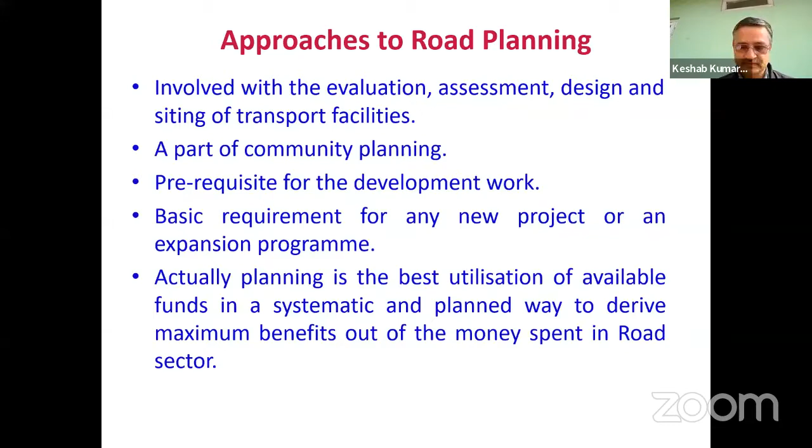Methods of transport planning. This is from a textbook of road transport planning. This is the standard practice.

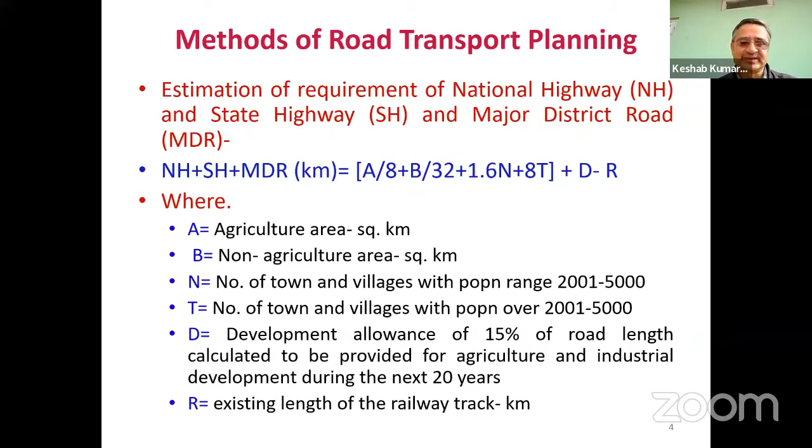Okay. So it is... there's a problem in slide sharing, please. Can you help me from there? You want me from here? Yeah, sure, from the host. Slide number 5, I think.

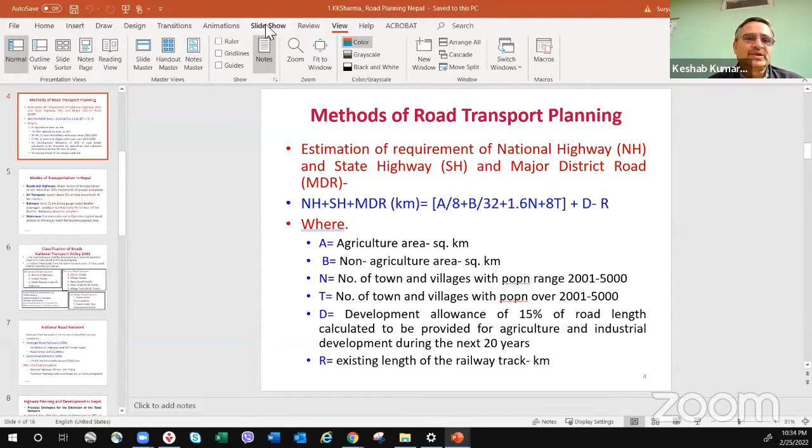Yep, that looks good. Modes, yeah. I wish to present the modes next. Sorry, the previous one, slide 5.

Modes of transportation in Nepal is heavily dominated by road transport, as 90% of movement of goods and freight depends on roads. Similarly, air transport covers about 8% of the movement, and railway is only 35-kilometer broad gauge, just ready for operation. It was narrow gauge in the past from Jayanagar, an Indian border city, to Nepal's Janakpur, and 17-kilometer from Kurtha to Bijulpura. It is almost ready, that is only 52 kilometers. It is ready for operation, but it is yet to start.

We hope from next month the rail will start regular passenger service. Waterway, commercially till now, is not in commercial operation. There are some small vessels on the major rivers for rafting or touristic purposes, and small ferries are now in operation.

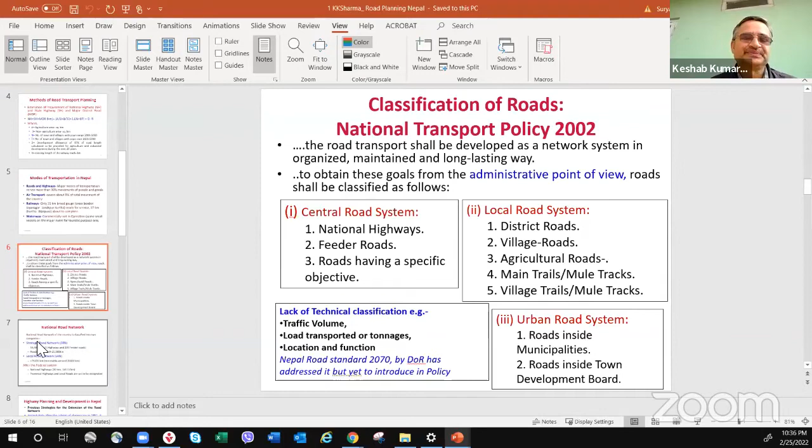The next slide. So, there was a question here, just quick. There was a question, why can't we present in Nepali also? So just feel comfortable, whatever you feel comfortable. I just wanted to share that question.

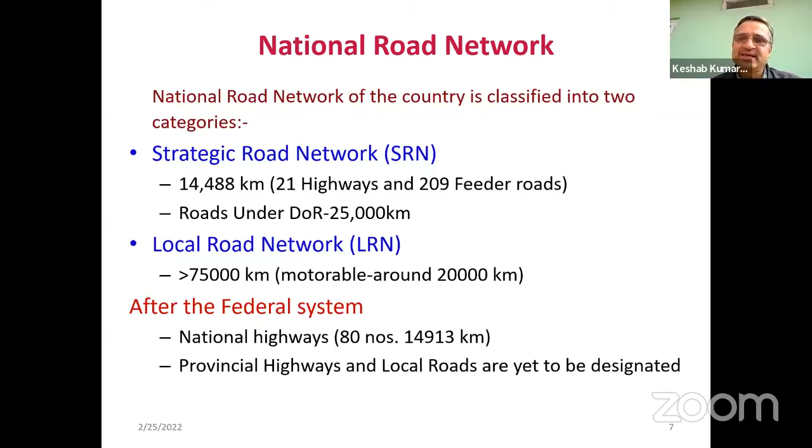Okay. So national roads network, हामीसँग strategic road network, which is under the federal government. It is almost 15,000 kilometers. And local road network is almost 75,000 kilometers. But after the federal system, we have just designated 80 highways as national highways, which is almost 15,000 kilometers in length. Provincial highways and local roads are yet to be designated from the respective level of the governments. Next.

Regarding the planning approach, I already presented in my previous slide that we had not applied that formula or any other standard as in the textbooks. We had an approach that road extension or development of the country is based on the following approaches. Immediately after the advent of democracy, that is in 1951, it was felt a reliable road network was needed. After that, development of the country, promotion of national integrity and efficient administration of fast and reliable means of communication was required. The best alternative could not be other than the road transport.

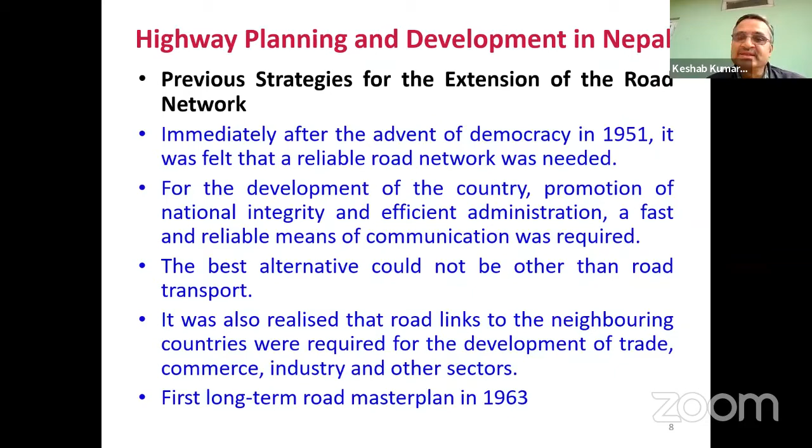So it was also realized that road links to the neighboring countries, link with China and India at that time. So this Tribhuvan Rajpath and Arniko Highway constructed at that time. First long-term road master plan was developed in 1963. Next. After that, the road Master Plan 2003 to 2022 was developed.

Before that, the approach for road planning development plan, we had some strategies applied at that time. That is, establish road link from Kathmandu to the nearest border town, construction of East-West Highway, construction of link road, China border, Arniko Highway, link road to economically vital center within the country, construct access to all zonal and district headquarters. It was actually the strategies of the government how to develop the road network.

Then 20-year road master plan for strategic road network was prepared in 2003 up to 2022 period. And then for the local road network, all the districts prepared district transport master plan, and the local level roads were developed based on that master plan. Next.

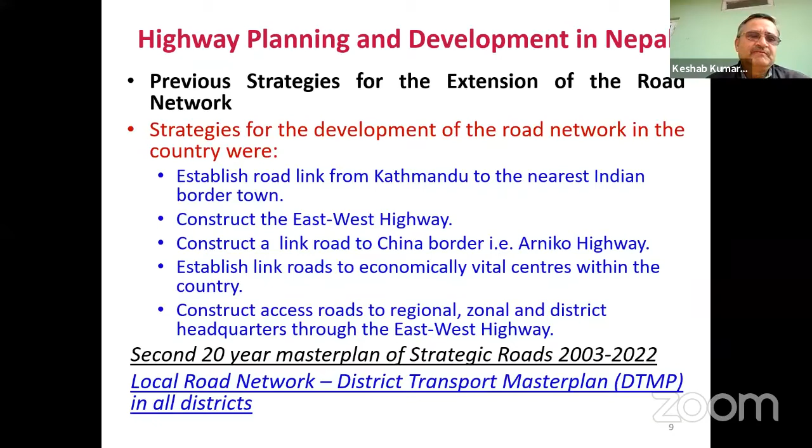Yes, Sabji, you have about 2 minutes.

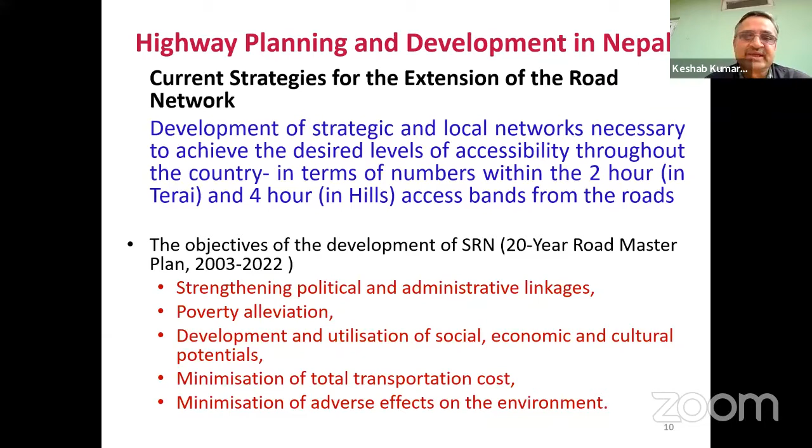Okay, current strategies, now the strategy has been changed after the 20-year master plans enforcement, strengthening political and administrative linkage, poverty alleviation. It was linked with poverty alleviation, development and utilization of social, economic and cultural potential. And the overall plan was based on National Transport Policy 2002.

After that, 20-year master plan, priority investment plan, periodic plan, 3 and 5 years periodic plans we have, and then MOPIT in 2016 prepared a 5-year strategic plan, and then annual projects. These are the hierarchies of planning for road development in Nepal, but not complied fully, as the annual projects come from out of the plans. Next.

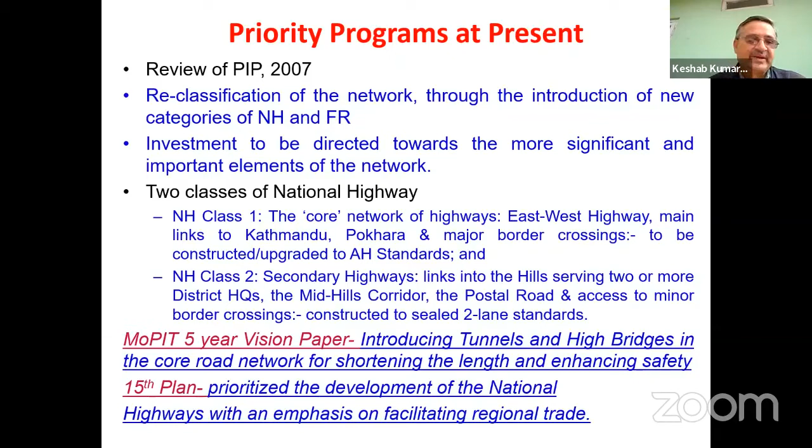This is the strategy we have adopted in our priority investment plan. That is core highways and secondary highways. We are developing the highways in 4-laning, like expressway, Kathmandu Tarai, on the basis of this priority plan. Next.

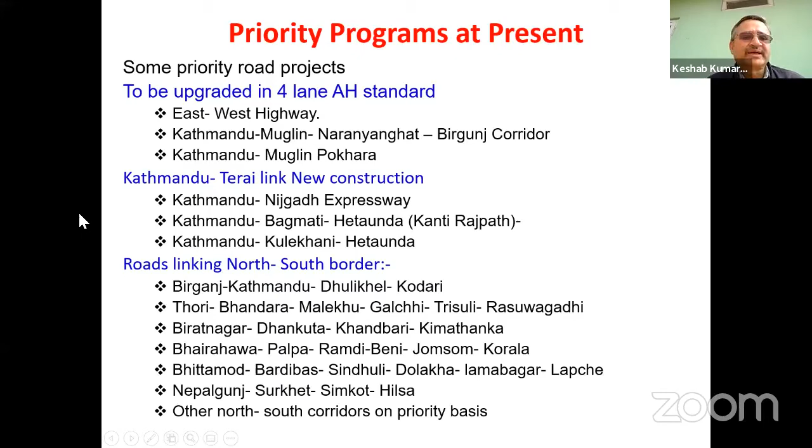We have these road sections to be upgraded according to the priority program of the government. That is East-West Highway, Kathmandu Mugling Narayanghat Birganj corridor, and Kathmandu Pokhara. These are under 4-laning these days. So I would like to go to the next slide.

So there are some issues of planning in road transport in Nepal. Transport policy is almost 20 years old, so it couldn't address the 3-tier federal system of the government. Lack of multimodal transport plan; the road sector is dominating heavily in the transport sector. No single authority responsible for road development. Even in the central government, there are the Ministry of Local Development, Ministry of Urban Development, and Ministry of Physical Infrastructure and Transport. So there is no single agency.

Confusion in priority for projects, scattered projects, many projects with less financial resource. So too many road projects, political domination over the professional idea during planning, non-feasible road projects, various standards, no integrated national standard. Various agencies have their own standards, non-compliance with the standard planning process or best practice, reluctance of the private sector in the development of roads, and sustainable use of the road asset as well.

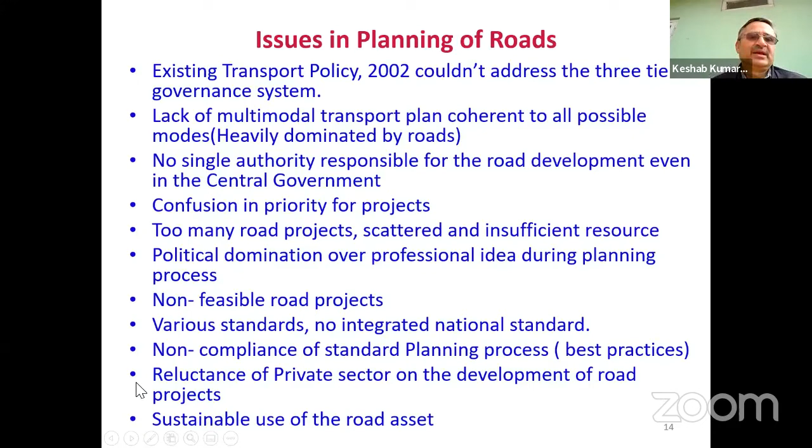So for addressing those issues, I would suggest some ways forward in this slide. New transport policy addressing the rights and responsibilities of all three tiers of government under the federal system. Integrated transport master plan coherent to all feasible modes on a competitive and complementary basis. Single agency to be responsible for each tier of the government for the development of road transportation. Effective coordinating body for all levels of government.

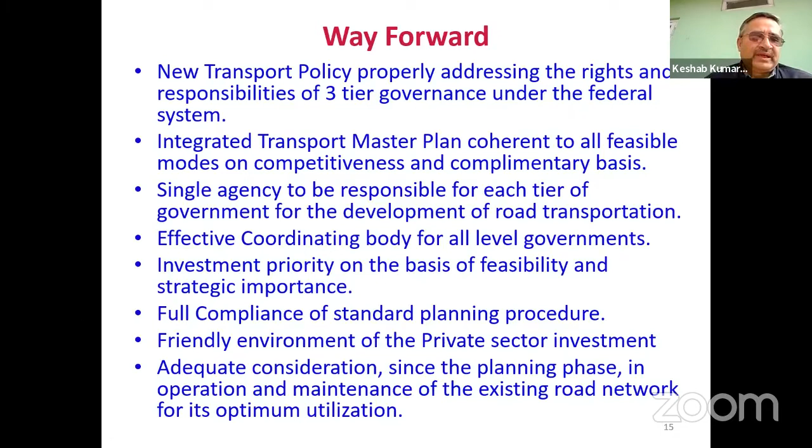Investment priority on the basis of feasibility and strategic importance. Full compliance with standard planning procedure. Friendly environment for private sector investment in road development. Adequate consideration, from the planning phase, of operation and maintenance of the existing road network. These are some ways forward which we have to consider in planning the road transportation system. This is all I wish to present here, and I will address any queries from the participants.

Thank you, Mr. Sharma. Let's move to our next presenter. All the questions we will be answering at the end of the session. Dr. Parajuli, the floor is yours now. So you will be controlling my slides, right? Yes, sir. Mr. Thapa will be moving your slides. Okay, Mr. Thapa, can you show me the first one? Go back to the first one.

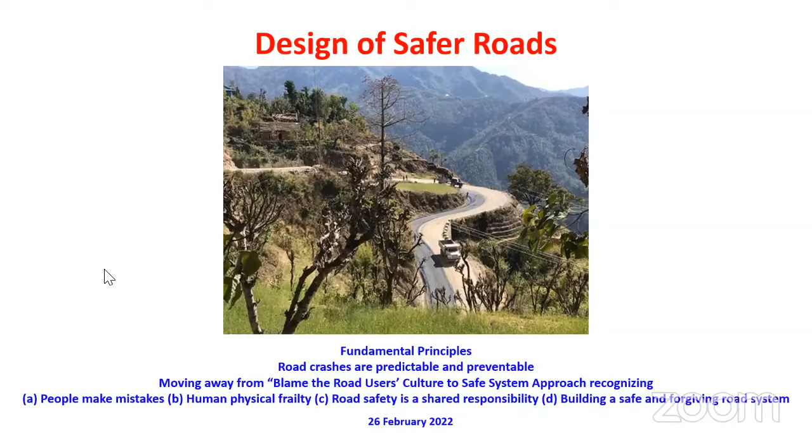And then we need to build a safe and forgiving road system while designing the road. It's not just about designing the road, the embankment, the structure. It's about designing the environment itself. Next slide, please.

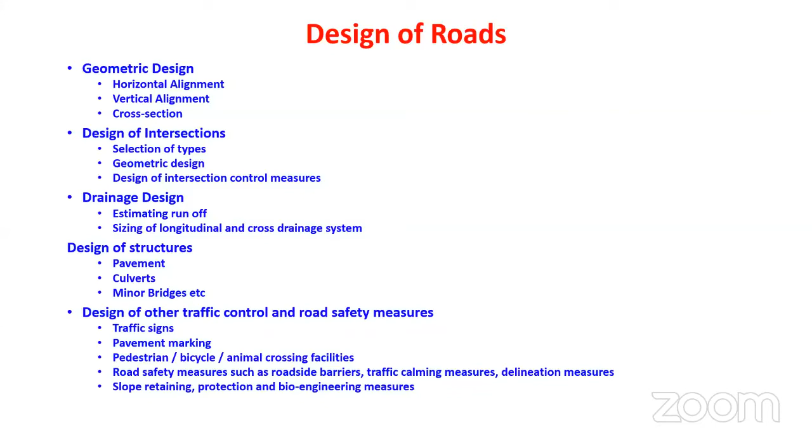With this slide, I'm taking you back to your university time. These are some of the elements we have to deal with in the design of roads, which you are all aware of. People with a civil engineering background all know about road engineering. This is what we dealt with in the design of roads at university. Let's go next. Next slide, please.

Now, we need to recognize a bit of what the design philosophies are. There are old schools of thought and new schools of thought. Today I'm presenting a bit of the new school of thought because this is very critical in the design of safer roads. There are three different domains that have been applied in the design of roads: the normal design domain, the extended design domain, and the third one is design by exception.

So the difference here in the design of roads in Nepal is that we tend to adopt a normal design domain only. Nepal road standards and many other standards basically require that the road design engineer design a road with the values, for example the shoulder width or the carriageway width, in the normal design domain, which is a bit less flexible or less liberal than what we can use during the application of the extended design domain or during the application of design by exception.

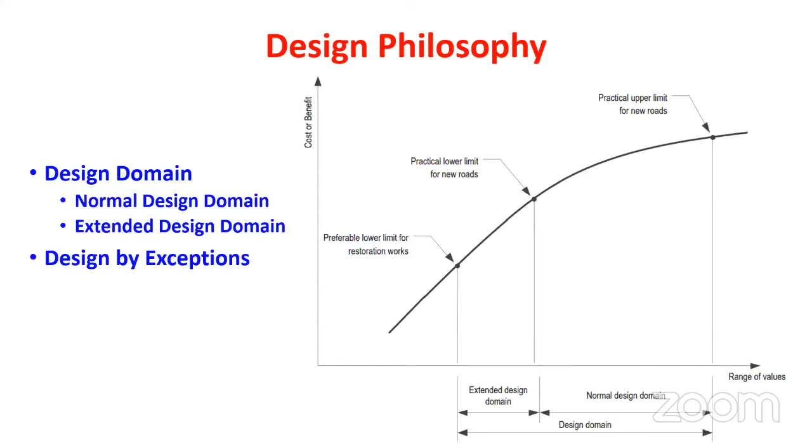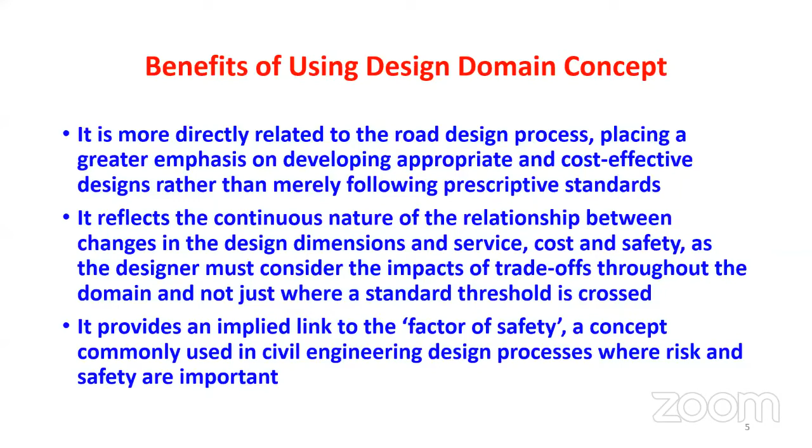So I just wanted to highlight some of the benefits of using the design domain concept. It allows flexibility to the engineers rather than just taking one single figure for the design carriageway, for example, 3.5 or 3.75 meters wide. It allows the designers to use different figures that they think are reasonable and that will be fit for purpose and so on. Next, please.

And we need to have the flexibility. The designer needs to have the flexibility to use values less than that. For example, a 3.25 meter width may be enough. Why do we have to use a 3.5 meter wide carriageway, when even 3 meters may be enough for urban roads? Why do you need to provide a 3.5 meter carriageway in the urban road? That's a typical example. There are many other examples where we can apply extended design domain and design by exception values. Next, please.

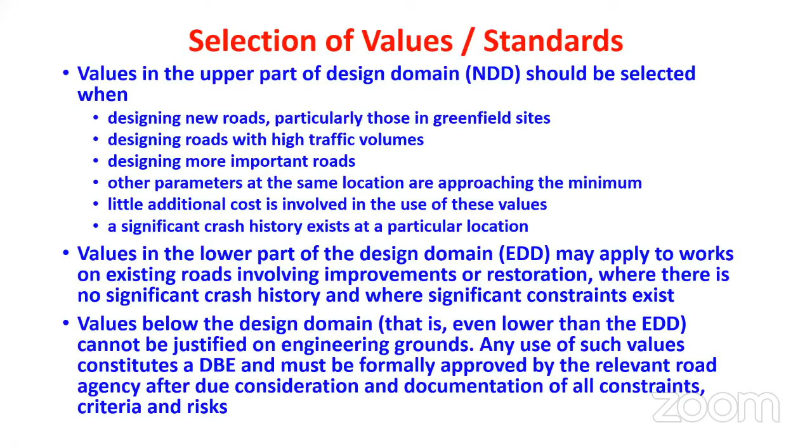The current Nepal road standards require that we design a national highway with a 2.5 meter shoulder. But what I'm saying here is, if there are terrain or other constraints, we can go as low as 0.75 meter. And by the way, the Nepal road standard also allows a 0.75 meter shoulder width in constrained situations, but that's not the case for all other parameters. Next, please.

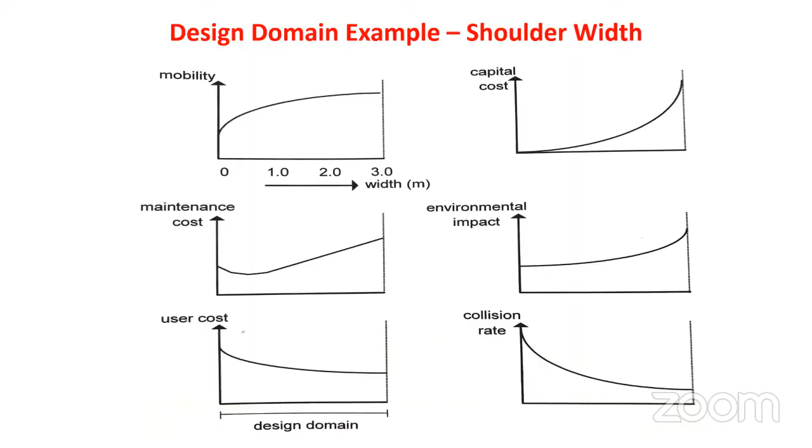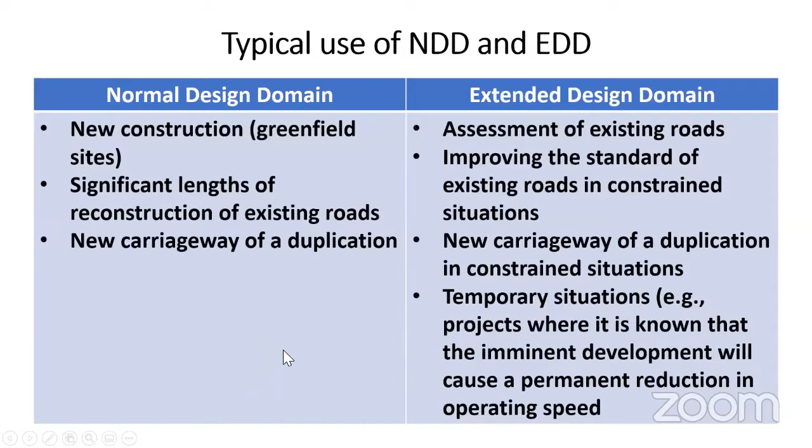Okay, now the design domain, just to give you an example of how we can apply it. When you use wide centerline treatment for safety measures, we can use the normal design domain of 1 meter wide centerline treatment. That doesn't mean that we have to use a 1 meter wide centerline everywhere. We can use 0.6 meter wide centerline treatment if we apply the extended design domain concept. And if you can demonstrate that the risk is assessed and mitigated and safety is not compromised, then we can use 0.5 meter wide centerline or median treatment if we apply design by exception.

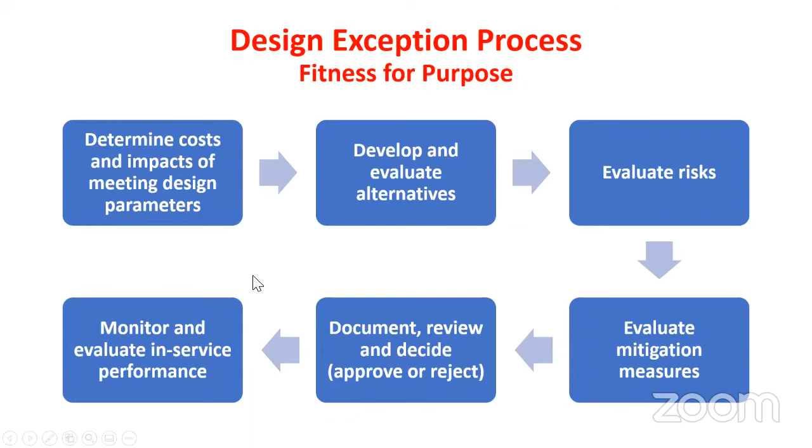There are a lot of things that need to be done, a lot of issues, a lot of challenges, and therefore a lot of opportunities for improvement in the revision of the Nepal road standards. That's the thrust of this presentation, and this is what I am suggesting: we need to revisit the road classification and connection strategy before we develop a new version of the Nepal road standards. Next, please.

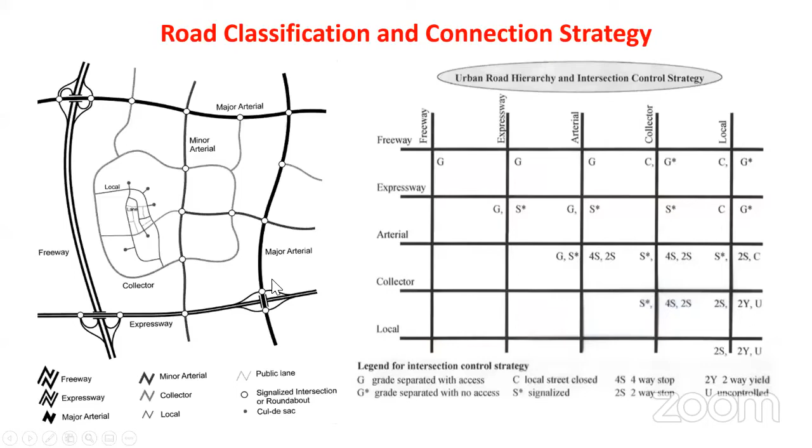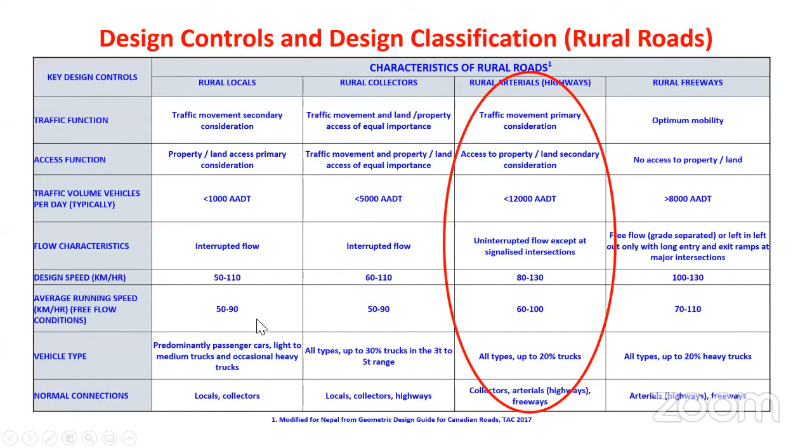Based on that classification, this is just one idea to flag to Nepalese engineers and engineers practicing in the USA who want to contribute to the development of the new revised Nepal road standards: design controls, classification, and consistency. So this is the classification approach that we may suggest in the development of new road standards. Next, please.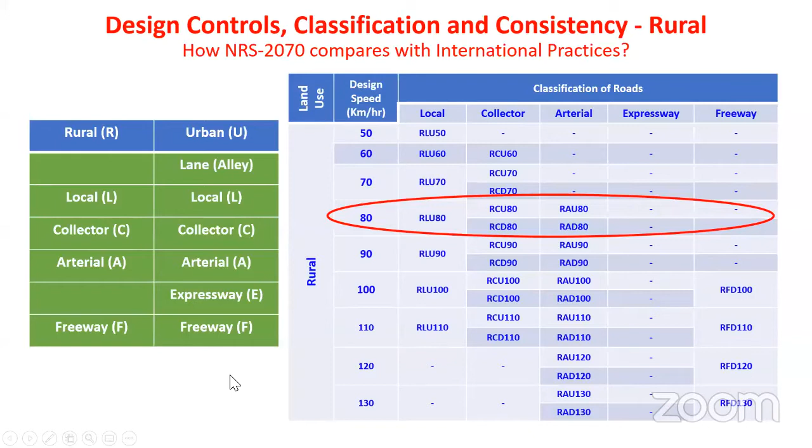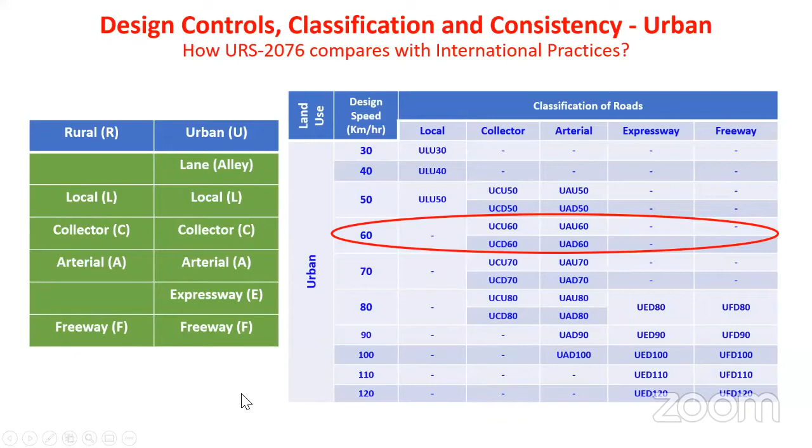And this is probably for the urban road environment. Different classes of road, and there are so many classes of road that we can introduce, not just national highway or collector and arterial. This is based on the speed, the functional classification of the road, and whether there is a median in the center or not. See, this is divided arterial urban.

And this is a road environment and road classification design table, which shows a lot of figures. I don't want to go into that detail. So these are the parameters, just to plan what we can suggest in the revision of the Nepal road standards. Next, please.

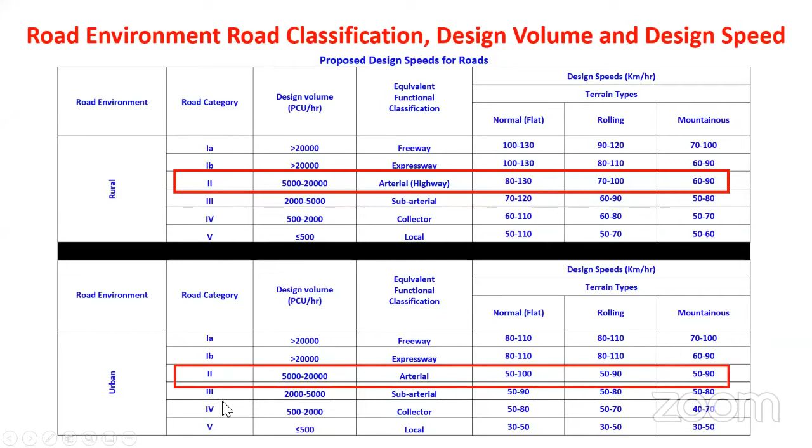Yeah, there are so many numbers here; you can look at this. The fundamental issue is that the classification of roads for urban and rural environments should be different, and we need to use many classifications, not just a few, like 4 or 5. Let's go next, please. And this is another one, basically the rural or urban design classification and design speed again. Next, please.

Next, please. Yeah, next, please. Yeah. Again, the same issue here. Go ahead. Now, okay.

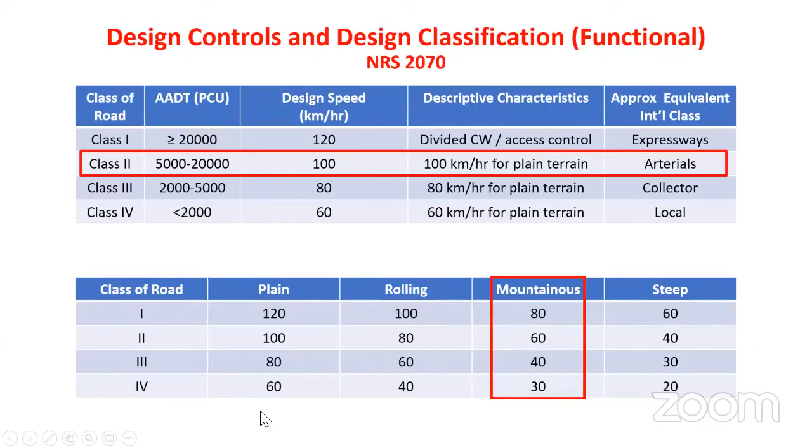So I'm just now comparing with those figures. So many figures there, so many classifications of roads that we need to introduce if we want to design a different class of road. One class of road does not fit; one size does not fit all is the basic philosophy here. So what is the difference here in design controls and design classification? In functional classification, Nepal road standards have only 3-4 classes of road with 4 different ADT and design speeds. So if you have a class 2 road design, then you have to apply only 100 km/h. What I wanted to show on the previous slide is that there are so many classes of road that we can apply.

So today I'm going to discuss with you all the maintenance of road assets in Nepal. Next slide, please. I would like to begin with what a road is. The road is more than what we think it is. The OECD International Transport Forum has defined road as more than asphalt, concrete, or steel. It is the backbone of national economies, providing connections for people and goods, access to jobs and services, and enabling trade and economic growth.

So road has a broad function of providing services to all. Even though we stay at home, we get newspapers or milk, and kids are going to school using bike or bus, and roads deliver services to all, even those who are staying at home waiting for mail, e-commerce delivery, nursing services, and ambulances. So even for those people who do not travel, the road is essential. That is where I start, and this essential commodity is not properly maintained.

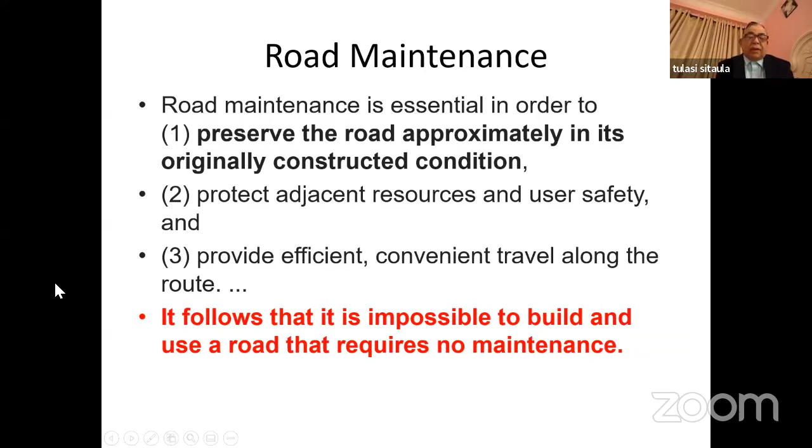Road maintenance is one of the neglected areas, and we need to maintain our roads to preserve the road approximately in its originally constructed condition, or to maintain the level of service, and also to protect the adjacent resources and user safety, and provide efficient, convenient travel along the route, that is a level of service. And it follows that it is impossible to build and use a road that requires no maintenance. Hence, we need regular maintenance of roads if we want to use it at a very good level of service, and also for preserving the asset. Next.

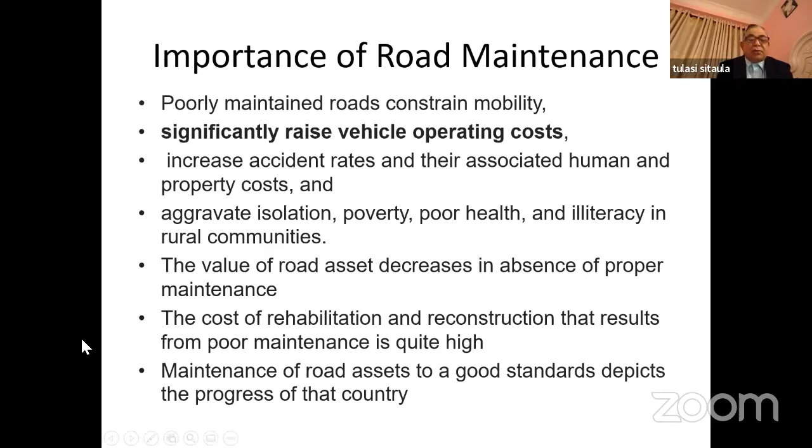We know the importance of road maintenance because poorly maintained roads constrain mobility, significantly raise vehicle operating costs, increase accident rates and their associated human and property costs, and aggravate isolation, poverty, poor health, and illiteracy in rural communities. The value of the road asset decreases in the absence of proper maintenance.

The cost of rehabilitation and reconstruction resulting from poor maintenance is quite high. Maintenance of road assets to a good standard depicts the progress of that country. Road maintenance is very essential work, but it is mostly neglected in most developing economies. Overcoming the backlog and implementing road asset management benefits the whole society and country by improving decision making with better data, ensuring mobility and its benefit to society, managing the network efficiently, preserving this huge financial asset, and providing a safe and reliable road free of risk to road users. Well-maintained roads promote better living.

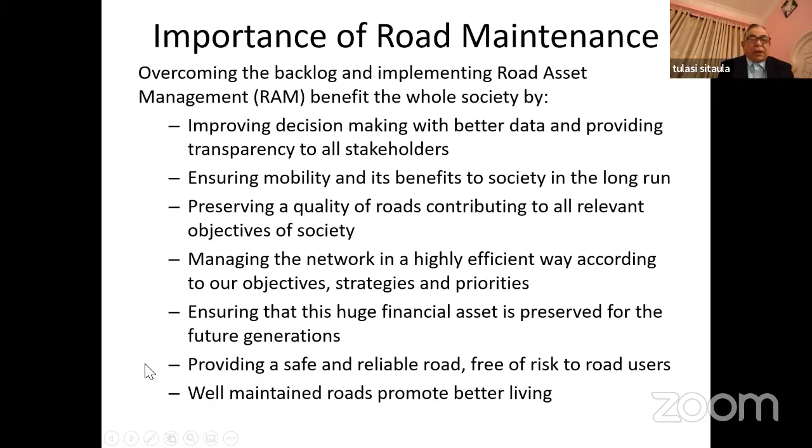Now I'm going to talk about the Nepal context of maintenance. Nepal had an ad hoc maintenance practice started during the Rana regime. There were some roads in Kathmandu Valley during the Rana regime, and they used to maintain the road through an office called Bato Kaj Goswara.

Responsive maintenance through gang labor was practiced up till 2053 BS in Nepal—just up till 25 years from now, maintenance was purely responsive. Planned maintenance, consisting of routine, recurrent, and preventive maintenance, was initiated in the year 2053 BS, and it is adopted till now. We are still in that system.

There are mixed results with this planned maintenance approach, and it is time to think about a new, efficient, and innovative maintenance system for Nepal. Performance-based maintenance contract, PBMC, was applied to some road sections on the East-West Highway with donor support during 2060-2067 BS. The results were not as planned, and PBMC was then stopped in the year 2067. It has already been 11 years and we could not start it again.

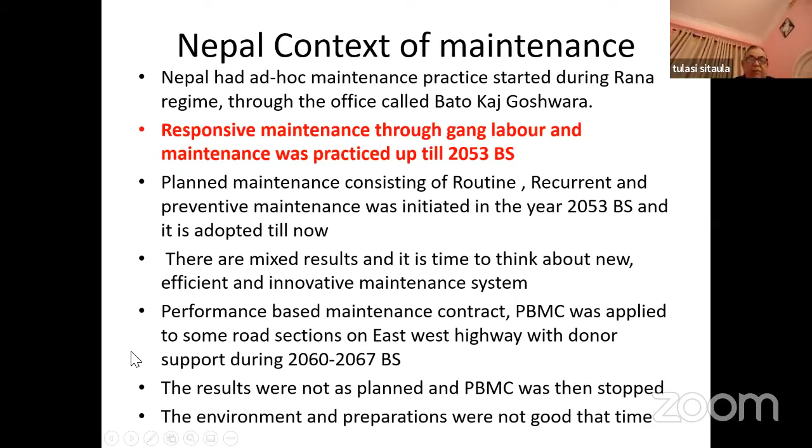We are discussing and thinking of restarting it. The environment and preparation were not adequate at that time, so we have to discuss again and start the PBMC.

Lack of adequate maintenance and lack of maintenance funding is the major cause of backlog. There is no adequate maintenance funding, and for whatever funding we have, we are not consuming all the money allocated for maintenance. So the result is poor maintenance of our road asset.

Maintenance activity did not get due priority at all levels. There has been no growth in the maintenance budget over the last 4 years—if we look at the budget, it is stagnant. Asset and network management activities are needed to ensure that the transport agency has a robust system and process in place for asset and network management planning and investment decisions, which we lack as well.

We need to adopt an approach of nationally planned, provincially delivered, because the central government needs to make the policy, while implementation of most of the road goes to the provincial level. So we have to go for this approach with our federal system.

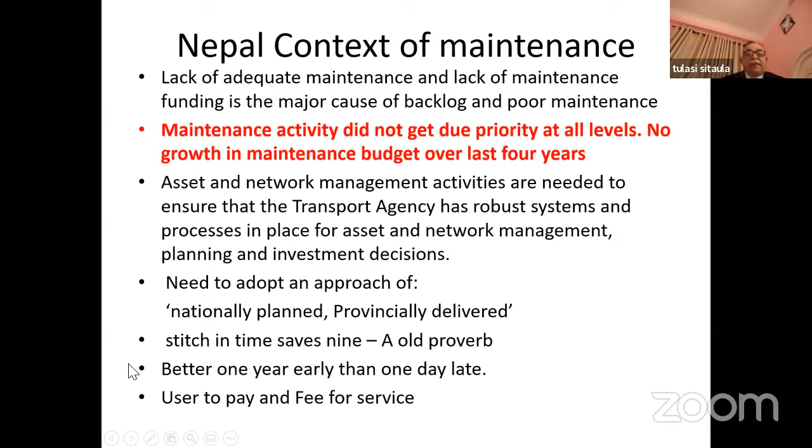We all know that a stitch in time saves nine, so we have to maintain our roads at the proper time. It is often said that it's better to maintain the road 1 year early than 1 day late. User-to-pay and fee-for-service is the present concept of maintenance and commercial use.

Our roads are facing problems in maintenance because we have very poor water management on our roads. In one of the photos, the dust management issue is also shown. So regular maintenance is also poor with us.

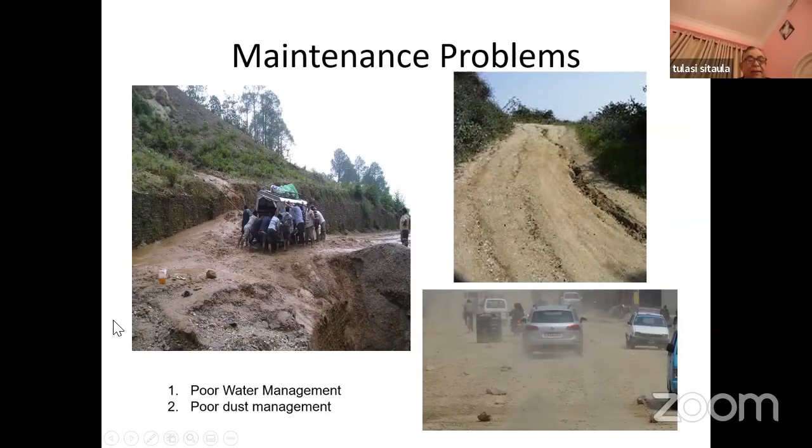Road is an asset, and it should be managed in that way. Roads are an asset from an economical point of view. Investing in new or existing roads increases the capital stock of society. Transport infrastructure is necessary to enable production and trade of goods and services and to provide citizens with mobility.

Chronic underfunding and poor maintenance very quickly damage this huge asset built at great expense and effort in the last decades. A well-managed transport infrastructure is vital to the economic stability, growth, and social well-being of the country. Highway structures like bridges are fundamental to the transport infrastructure as they form essential links to the road network. It is not in the public interest to allow highway structures to deteriorate in a way that compromises the functionality of the highway network, be it through restrictions or closure caused by unsafe structures, or the disruption of traffic through poor planning of maintenance work.

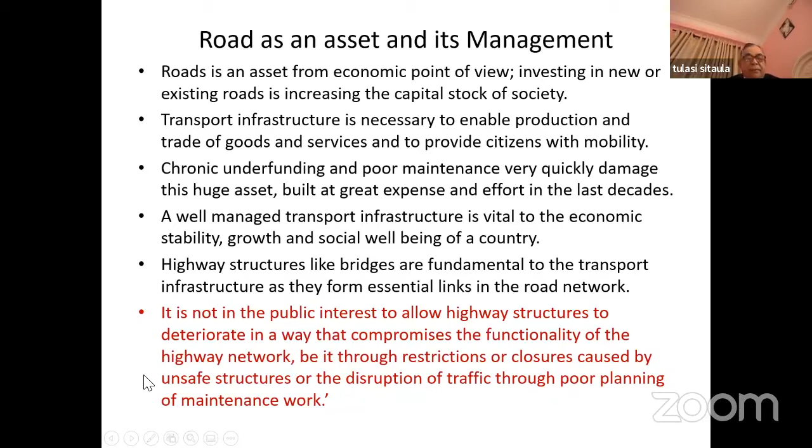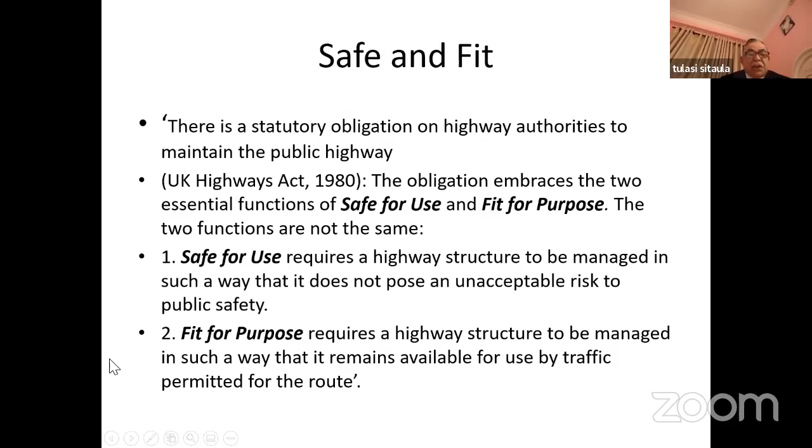So there's a concept of safe and fit for highway. Actually, it comes from the UK Highways Act 1980, which says the road should be safe for use and fit for purpose. This means it requires a highway structure to be managed in such a way that it does not pose an unacceptable risk to public safety, and also that it remains available for use by traffic permitted for the route. So these two fundamentals are to be taken care of while managing a road.

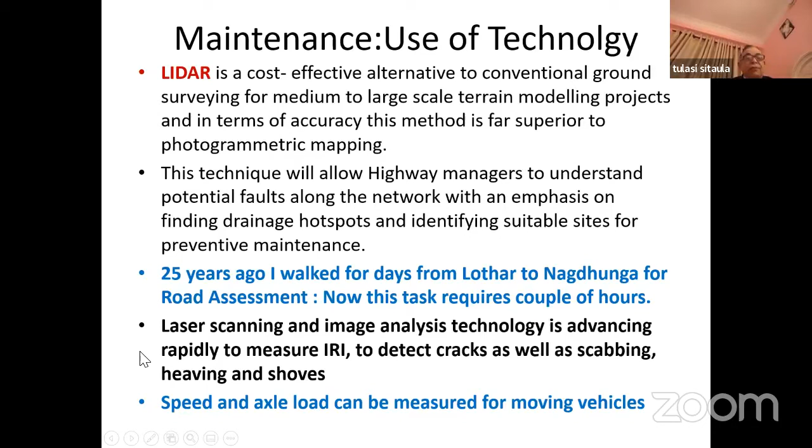Nowadays technology can help us a lot in managing our roads, like LiDAR technology. For example, 25 years ago, I walked from Lothar to Nagdhunga just to inspect and assess the road for maintenance. Now this job can be done in a couple of hours. We also have laser scanning techniques, and even speed and axle load can be measured for moving vehicles. So the technology has supported us a lot, allowing us to do the job very efficiently and quickly.

So we have the DOR vision, which is to ensure that 95% of our strategic road network is in good and fair annual condition. But if we look at the result, it is less than 80%, so we are far away from the target. We also want to substantially reduce the accident rate.

The DOR mission is to contribute towards the betterment of living conditions of the people through effective, efficient, safe and reliable road connectivity. There is a road safety action plan for 2013-2020, and now another one is being prepared for 2021-2030. It is about to be finalized, and the Road Safety Act is in Parliament.

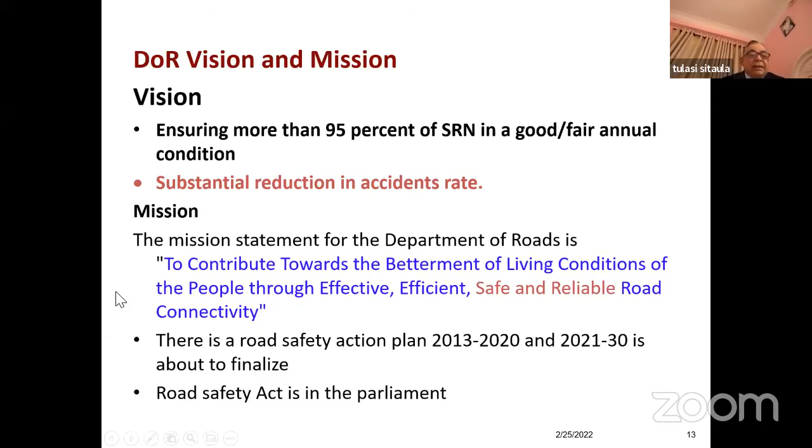We know the concept of pavement management. We don't want to allow the pavement to deteriorate to a very low service level, so we intervene at regular intervals to preserve the asset as well as maintain the level of service.

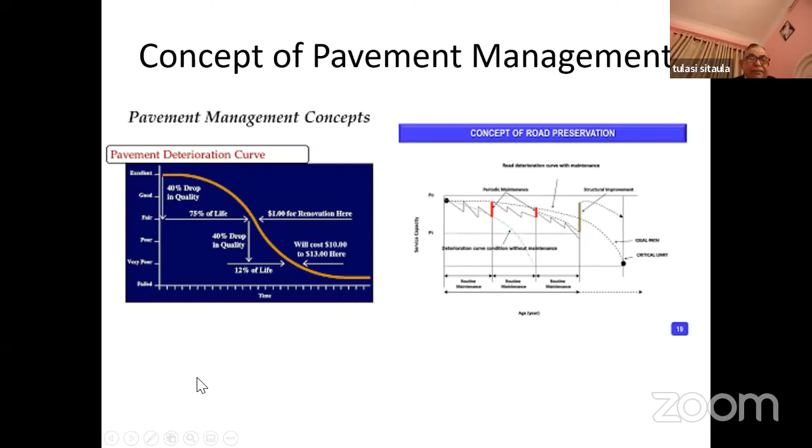So we have a maintenance strategy: whether to allow the pavement or our asset to deteriorate to the lowest level and then invest in rehabilitation and reconstruction, or go together with routine maintenance, periodic maintenance, and preventive maintenance as well.

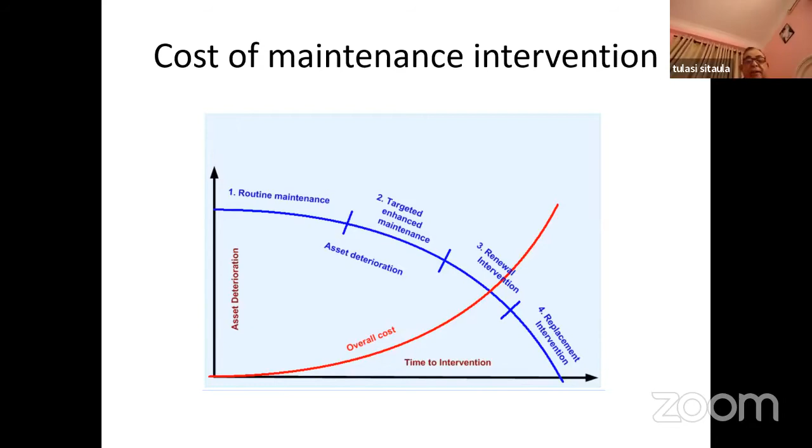The cost of maintenance intervention is less if we do it regularly, and if we let the road deteriorate and work on it in one step, then the cost goes very high. So this is what I want to show here.

So we have to maintain or manage our roads using a life cycle management concept. It has been realized that the entire road and bridge asset of the country must be operated, maintained, and preserved according to life cycle management principles. A country's road infrastructure inventory is the backbone; we need to have an inventory first. Transport infrastructure provides availability for public and commerce to perform daily tasks. The road network constitutes one of the largest government-owned assets, and road administration must maintain, operate, improve, replace, and preserve these assets, while carefully managing the scarce financial and human resources needed to achieve these objectives.

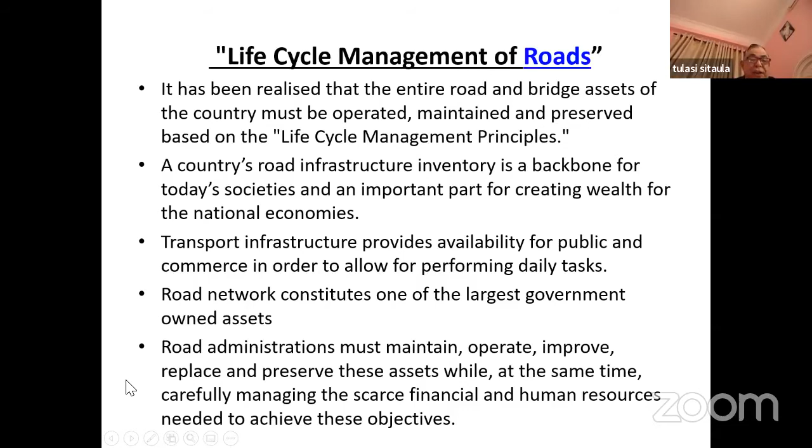There are accidents on our roads—on average, 8 lives are lost daily. So we are not able to control it till now.

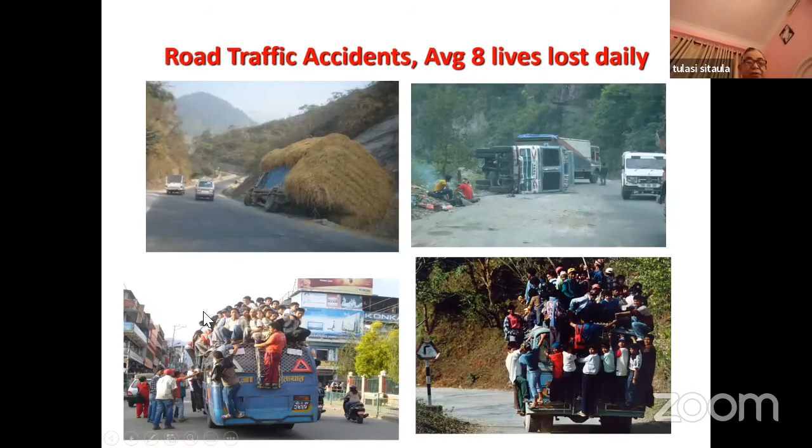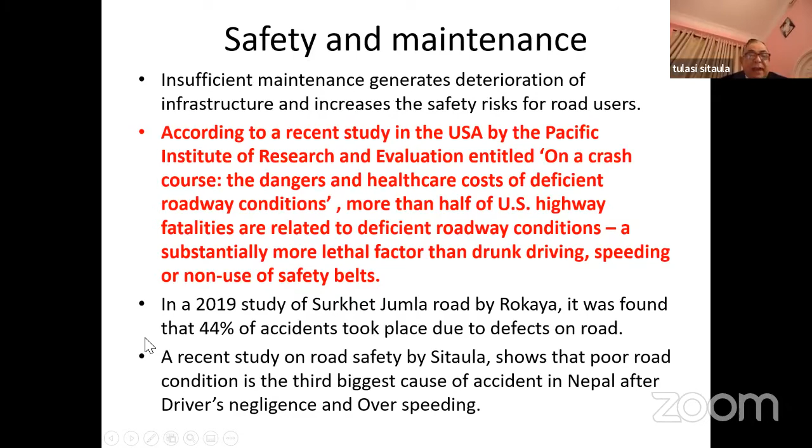Safety and maintenance are correlated. Insufficient maintenance generates deterioration of infrastructure and increases the safety risks for road users. According to a recent study in the USA, fatalities related to deficient roadway conditions are substantially more significant factors than drunk driving, speeding, or non-use of safety belts. Similarly, a study in Nepal in 2019 found that 44% of accidents on the Jumla road took place due to defects on the road. In a recent study done by myself, it was found that poor road condition is the third leading cause of accidents, after driver's negligence and over speeding.

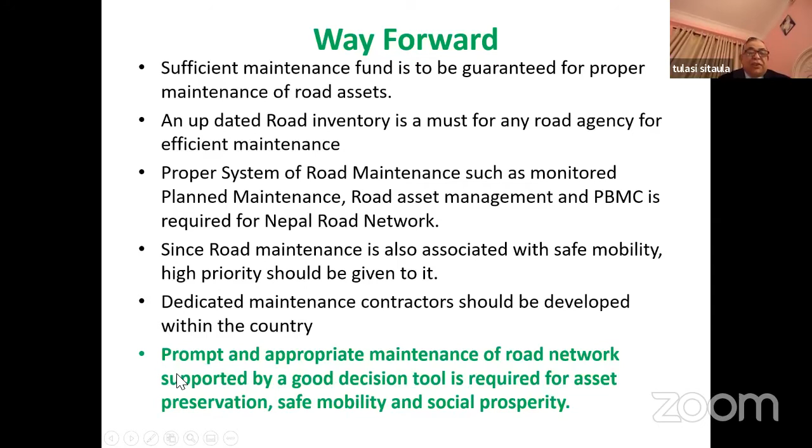Monitored planned maintenance, road asset management, and PBMC are required for Nepal's road network. Since road maintenance is associated with safe mobility, high priority should be given to it. Dedicated maintenance contractors should be developed within the country. Prompt and appropriate maintenance supported by a good decision tool is required for asset preservation, safe mobility, and social prosperity. Maintenance activity is often neglected and adequate funding is not provided. This should change, policymakers should think about it and go for regular funding and proper maintenance. That's the message I want to convey to you. Thank you.

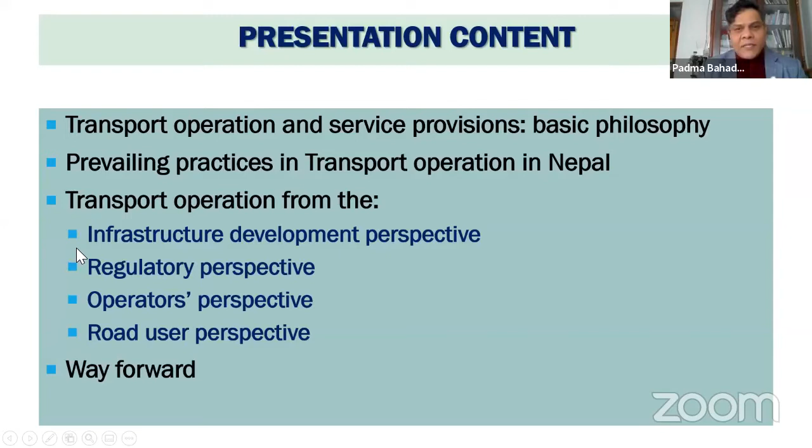First, when we talk about the fundamentals of operations and services, it means all operations and services are governed by transport policies, legal framework, and quality of service. There should be assurance of services, enforcement and control, principally based on competitiveness and quality service. The targeted result of all these efforts in the transport sector, building roads, building other infrastructure, organizing huge institutional arrangements, is for an efficient transport system, safety, and benefits of that system.

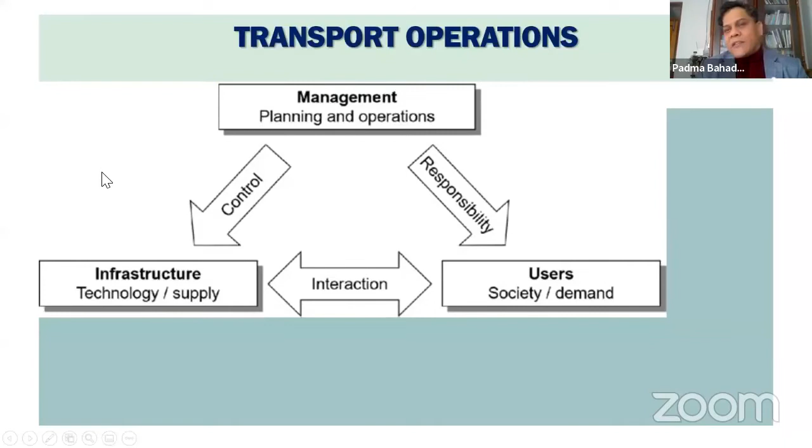When we talk about operations, we have to manage the road users perspective, road users' demand and society's demand, and it should be linked with the infrastructure. It should be managed with responsibility, interaction, and control of all these elements to give better results for operations.

To achieve better operations and results, we have to continuously make efforts to understand and optimize the system using our experience, and analyze our performance to determine how to deliver the service. We are continuously engaged in this system while investing a huge amount of money, so we have to be very careful about operations and service for better results. Thank you.

In the context of Nepal, as the previous presenter mentioned, we have a dominant road transport sector, and there is a major issue of operations that has been neglected. Just as maintenance has been neglected, operations are a more and more completely missing concept in the context of Nepal.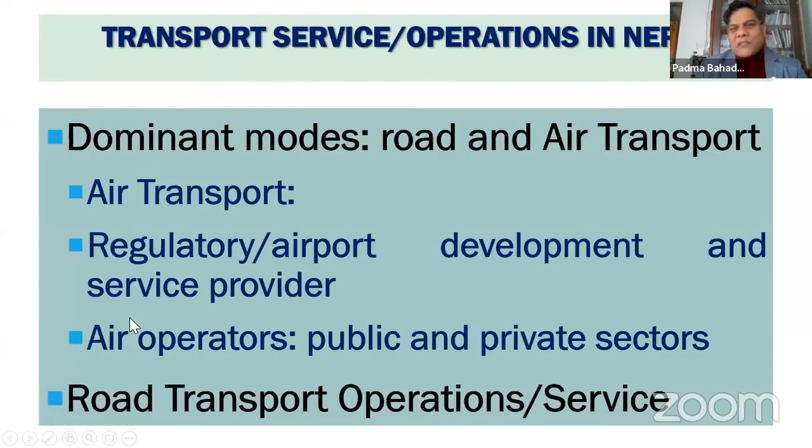Earlier we were thinking that investing in infrastructure means serving society. But presently we have to have new thought on this aspect, because for every infrastructure and engineering structure, when we talk about investment, we talk about benefits and costs.

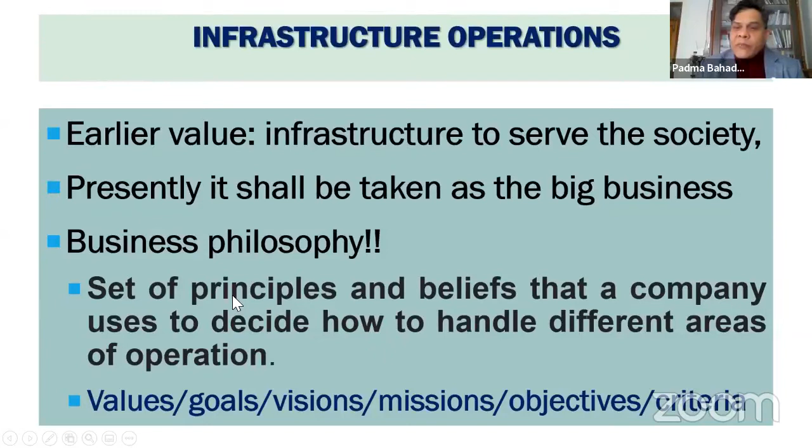So it is a business, we should think of it as a business. How to take benefits, we have to think very seriously, because when we invest a lot of money, we have to think about the concepts of benefits, values, goals, and visions, and what our basic objective is for this investment.

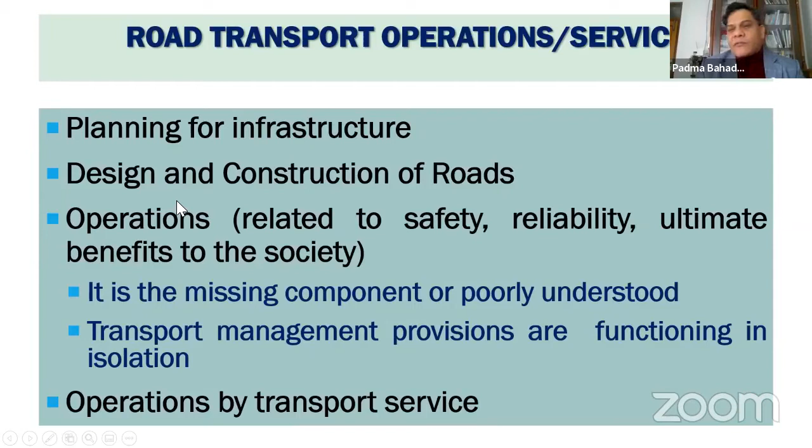Similarly, from the infrastructure perspective, when we construct roads, we forget about operations. As already mentioned, safety is neglected while designing and planning, and it has not been properly considered in operations either.

This operation is mostly a missing concept. I have already mentioned it from the infrastructure perspective. We have to consider what the operation will be from the perspective of operations. We have to have a plan. We have to design in line with the operations. We have to consider construction, the operations-specific construction, and maintenance as well.

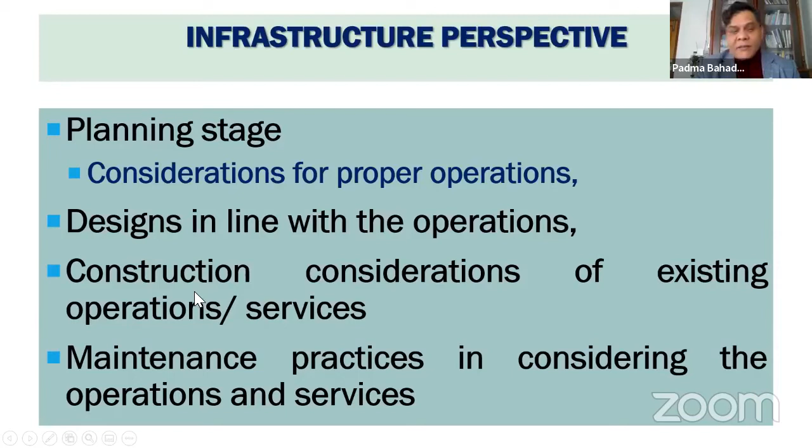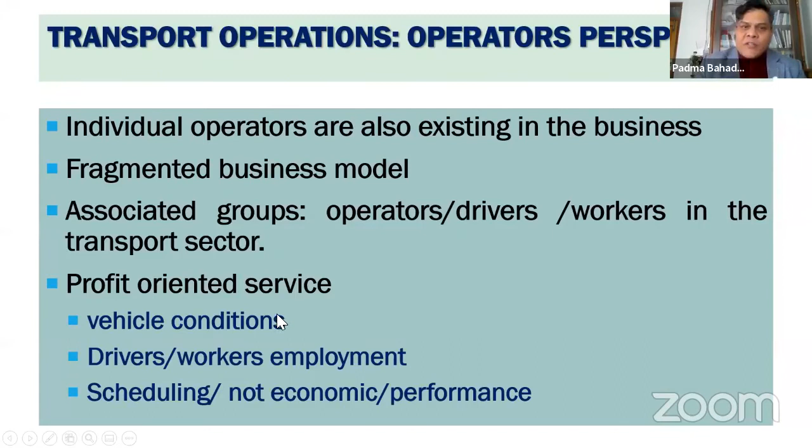Next, please. In the context of the transport operators, we know that all the transport services, especially road transport services, are provided by private operators. The business in this sector is not developed in any business model: fragmented, isolated, individual business. They do not have any reliability to provide the service, they do not have enough capacity, and they do not have any skill, investment plan or investment strategy. They make a very tiny business with day-to-day profit, day-to-day operations, and they do not have any kind of technology. It means from the perspective of operators, we do not see any new context and good things from these existing transport services. Please, next.

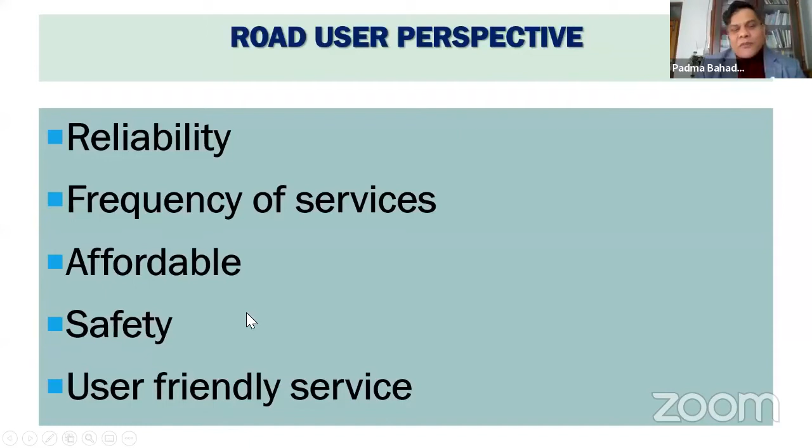From the road user perspective, we all are road users. We need to have reliability of our travel. We expect better and more frequent services. It should have affordable cost for the services, and safety. Maybe safety is the first thing, and we have to have better user-friendly services. These all things are the result of the operation part. So these things should be based on good, technology-based operations. Then we can achieve our objectives. We can get the benefits from our huge investment.

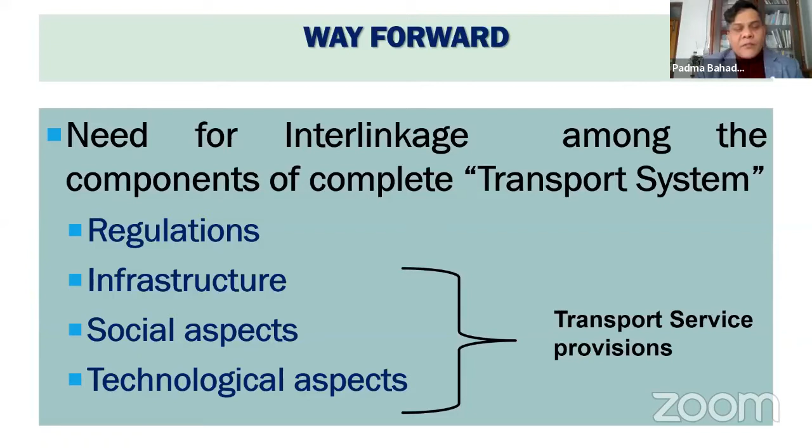Now, we need operations for transport service provision by uniting the regulatory aspects, infrastructure aspects, social aspect, and most importantly, technological aspect. In the transport sector, traffic management system and other road management systems, we have to have new technology, and for better results, for better management, we need to disseminate. We need to have use of this technological aspect.

Now, with all these missing things, we are going to have better infrastructure. We are planning, we are investing more money on infrastructure. Every province, every area, we can see multi-lane highways, including expressways under construction. We have now more international airports. Railway initiatives are also coming, and a number of east-west and north-south corridors are about to complete. This huge investment will give more benefit if we make the operations very efficient. Then we can get the results for the prosperity of our country.

Secondly, this sector is neglected. As we have already argued, transport service business should be developed. The transport service business model has not yet been discussed, there is not any policy. We have to make this. Urban mass transit system also, we are only talking, not doing anything to make better mass transit or public transport in big urban areas like Kathmandu.

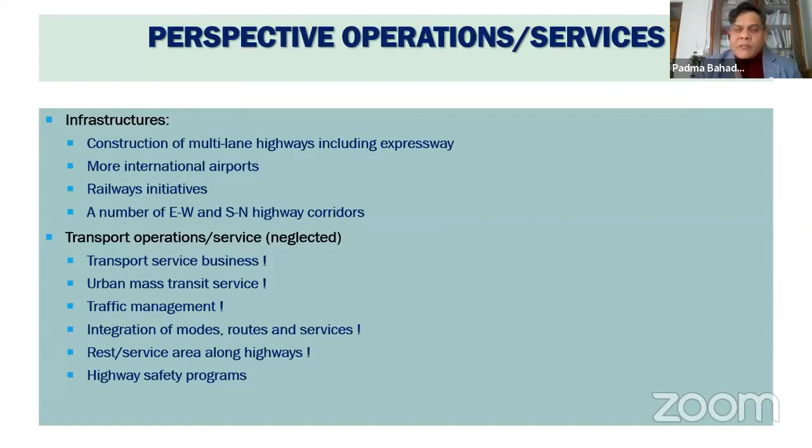And managing the infrastructure is very challenging here, because we know that even the government or public corporations are difficult to manage. In the same way, the roads with the huge investment are difficult to manage, and we have to have better understanding, better policy, and a better approach for this sector.

Next slide, please. We have 2 more minutes. Okay, I will soon finish this.

Now we have internet, we have communication technology. It's easy to transfer the technology. So now for better operations, vehicle technology is available. It's not difficult for us if we understand our context. Similarly, now in Kathmandu, the Department of Roads has started an ITS system.

We are going to manage the intersections with adaptive traffic control systems. Similarly, for the highway transport system, there are a lot of operations and safety initiatives. As previous speakers have told, we have the Road Safety Act in the Parliament, and we have road safety action plans. It means we are going forward, but on operations, we have to think very seriously.

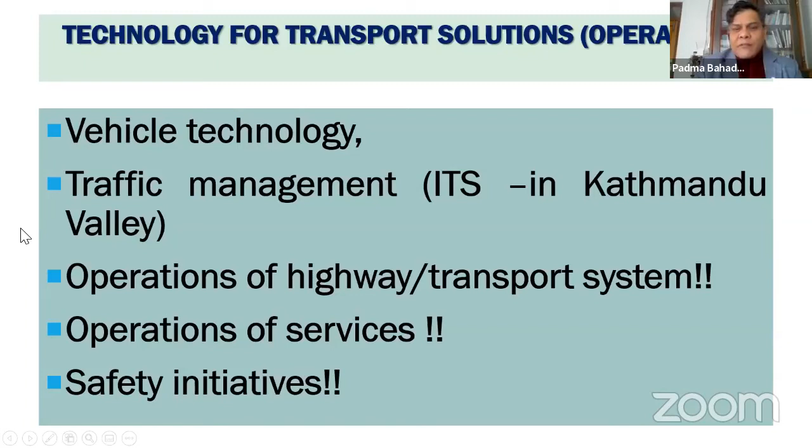This is great. I think we covered a lot of material here with 4 of our great presenters. And I believe we talked about traffic safety a lot in almost all of our components, as we promised in the beginning of our webinar. We have gotten a lot of questions, and there are several suggestions also. It is exciting to see the level of participation here, a very active audience. Thank you for making it so interactive.